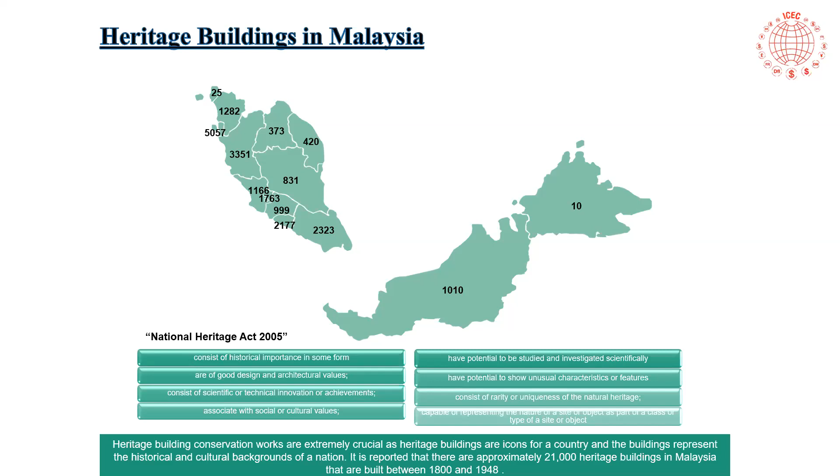Now we move on to the conventional approach of heritage buildings conservation. Before the digital approach, we have been using the conventional approach in conserving heritage buildings. So let's move on.

Globally, there are 5 main keys of good conservation practices. The first one is minimal intervention. Through this practice, we need careful recording and research. We respect the quality, and preference is given for the original materials. In terms of sustainability, we look into permanence in finished work. We need a well-defined maintenance plan and long-term protection.

The next key criteria is minimal loss of fabric with minimum alteration. We avoid beautifying it, but maintain it, and preference is given for the least possible loss. In terms of legibility, there's a distinguishable use of new and additional materials, and we avoid falsification of elements. Lastly, the fifth practice is reversibility, where we look into reversibility of intervention and allow for correction of unforeseen problems.

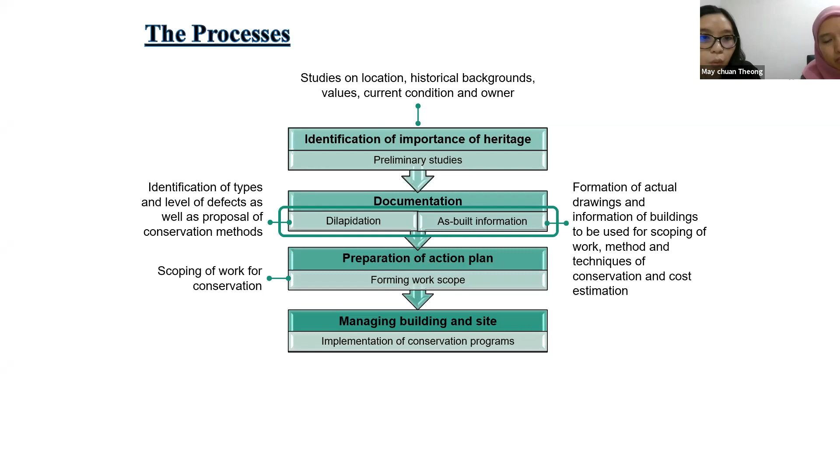The next step is preparation of the action plan, where we form the work scope, scoping down the conservation work, and planning the types of work to carry out. Once the plan is confirmed and verified, the final step is managing the building and site.

The implementation of conservation programs will follow the guidelines, reporting, recording, and all the documents mentioned earlier.

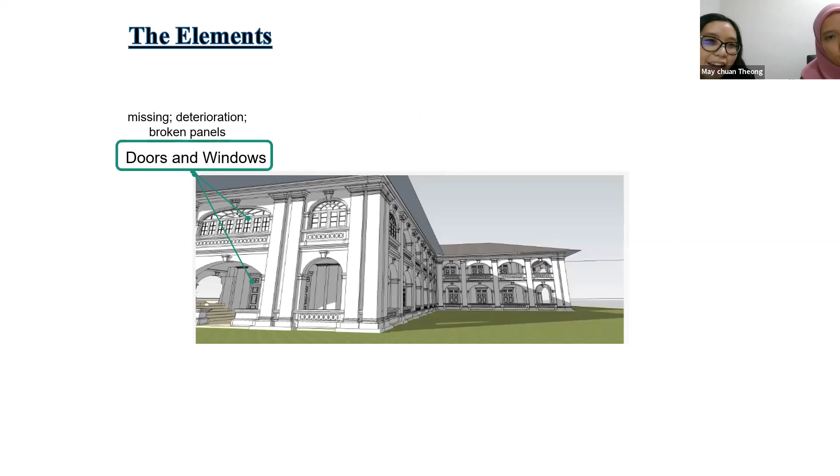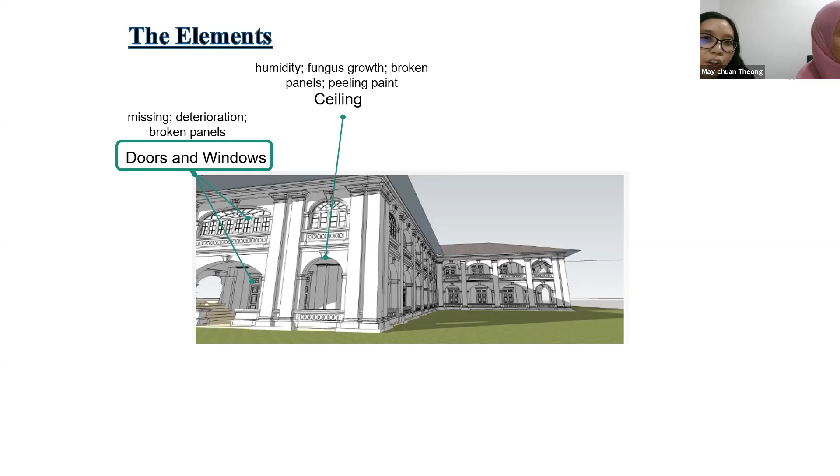Now let's move on to see what elements we usually conserve within the building. First, we look at doors and windows - are there any missing parts, deterioration, broken panels? For ceilings, the common problems are humidity, fungus growth, broken panels, and peeling paint.

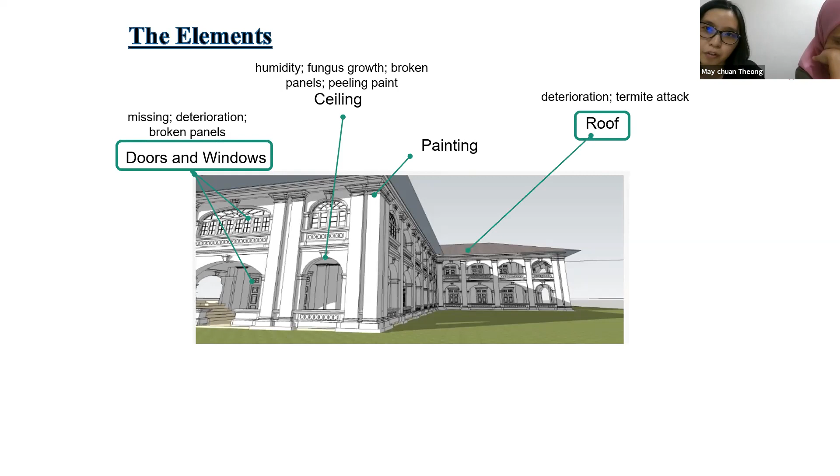Painting is something very normal and common that we usually have to take into consideration. Roof problems mostly involve deterioration, termite attack, and rainwater downpipe issues. Wall problems commonly include humidity, cracks, soil movement, deterioration, and thermal effects.

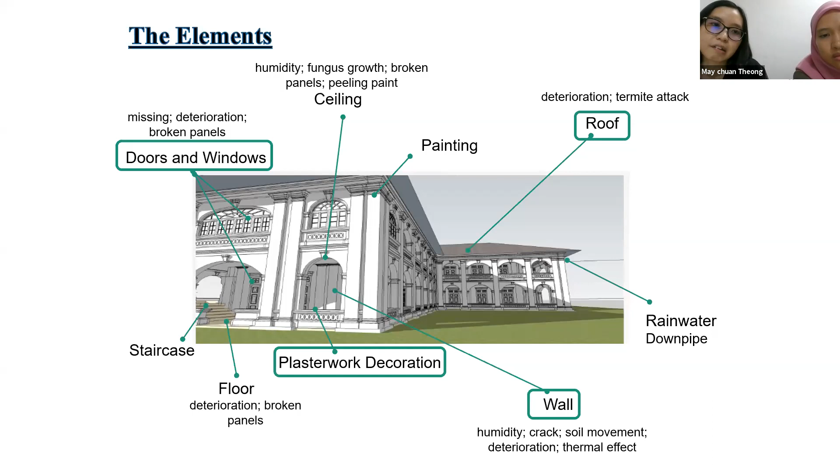Plasterwork decoration is somewhat a must-practice in conservation. For floors, the issues are broken panels and deterioration. Staircases commonly have defects as well.

So what factors contribute to effective conservation? First, we have to look into the amount of money we have to spend in order to conserve the building. The next is to look for similar materials and resources in order to maintain, not beautify, the building.

We maintain the overview or overall character of the building. We normally look for what was used years ago, so that we maintain the same material or resources. Different from new building works, it's not built from scratch - it's more on conservation, more on restoration.

The next factor affecting effective conservation is the responsibilities of the team - who is taking care of which part. That is also important, and the whole team would have a very clear mindset of what they are doing.

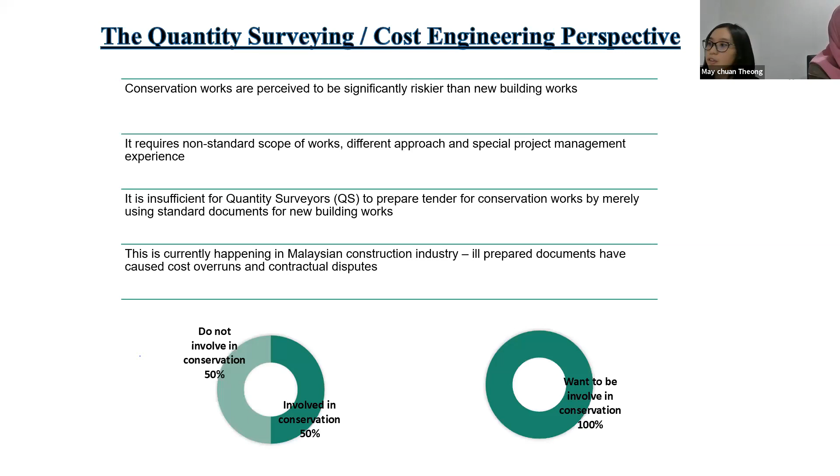But we also find out that there are challenges faced in these conservation works. These challenges have been categorized into a few categories: information-related challenges, people-related challenges, legislation-related challenges, knowledge-related, health and safety-related, uncertainties-related, and approach-related. There are a total of 30 challenges categorized into these 7 main categories.

The most severe challenge here is actually the requirement for specialized consultants. The second most severe challenge is lack of as-built drawings, followed by unknown risk, which requires a great amount of information for architectural works, failure to select a capable contractor, and availability of relevant skilled workers.

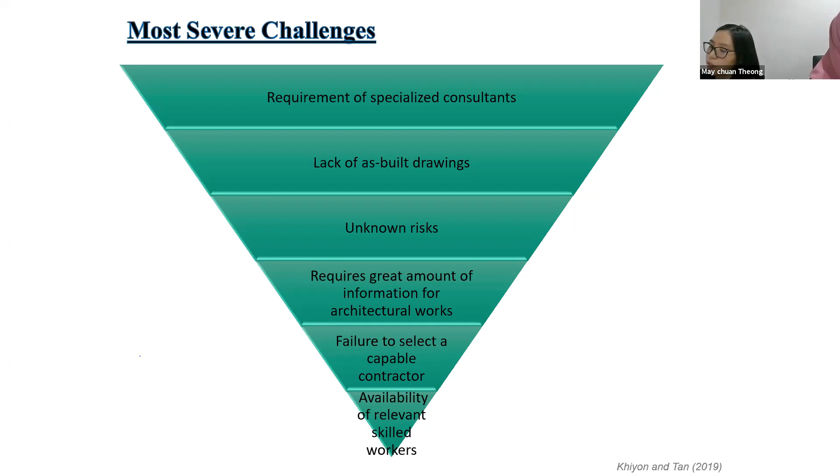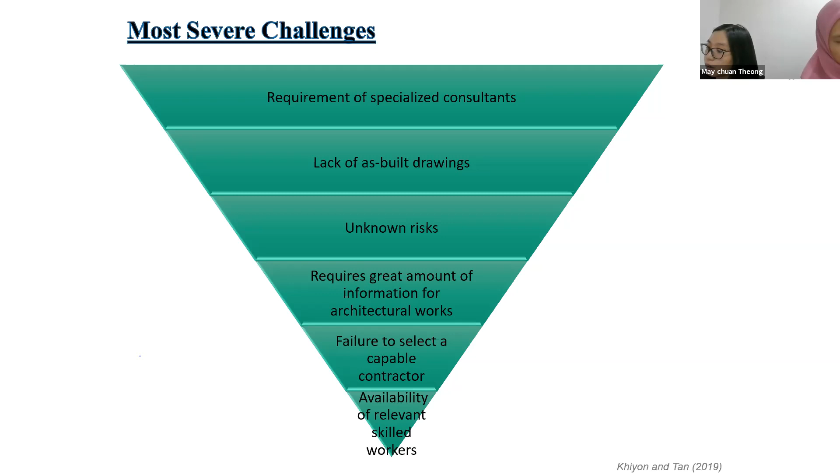Then about contractors and workers - these are people-related challenges. We believe that in the context of Malaysia, there is a lack of skilled workers due to the technical practice involved. We are also facing problems having experienced contractors in this field who are equipped with proper management skills to perform conservation practices for the projects. So these are a few challenges that we face here.

So what we can look into is the conventional approach carried out through a few processes. Before embarking on any physical intervention or design strategy for a potential conservation project, it is essential to assemble the availability of evidence on the building.

So the first part is the historical research that is available for us. We look at different sources of data, reports, and research. Then from historical research, we can identify the documentation that we need, for example measured drawing.

We know that a lot of architectural students actually start off from measured drawing. Measured drawing, or as-found drawing, means a set of line drawings that will accurately delineate the subject of the building in its existing condition. The measured drawing will illustrate the interior and exterior of a building, including the structural design. It will also illustrate the defect areas such as cracks in plaster and missing elements.

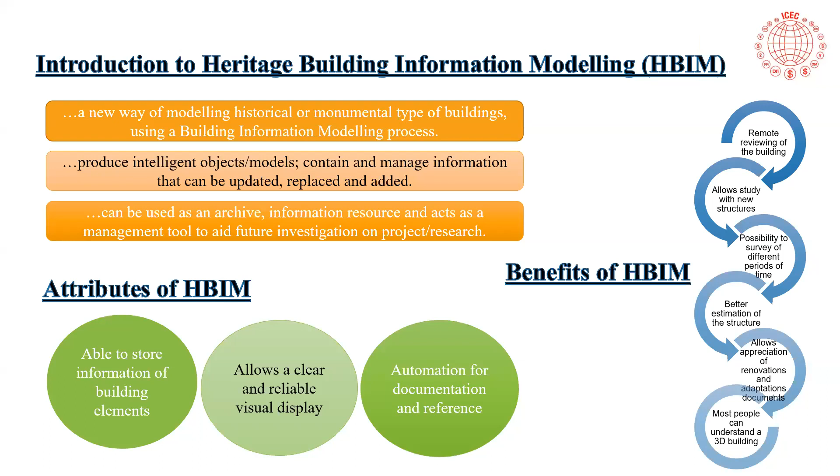So when we venture into HBIM, the first thing we have to know is the BIM tools. That's the most important.

All right, so if you look at the introduction of HBIM, the second point is it produces intelligent objects and models, containing managed information that can be updated, replaced, and added. Later we will go through the process from scanning to becoming a 3D model. From the 3D model, we can produce intelligent models, objects or elements that contain data information and related information. This gives us attributes of HBIM which allow a clear and reliable visual display.

And these are some of the benefits. There are a lot of benefits of HBIM, but I will show you some of them. The most important is that it allows study of new structures, because we know the heritage building has been built many years ago, so there are some structures and methods that we cannot find anymore in the current world.

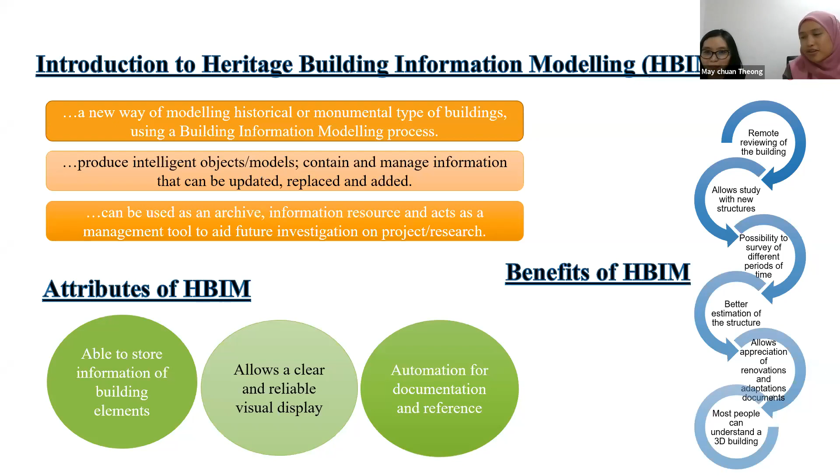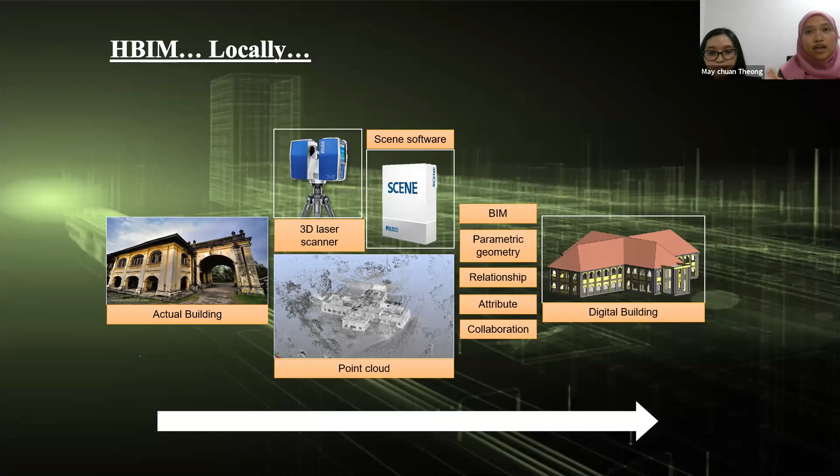After the point cloud, you get the IFC file or RCP file, which converts or links into Autodesk Revit or other architecture software. This is an innovative approach, a similar process. We will go through each stage one by one.

For the first stage, data collection: once you identify which type of historic or heritage building you want, first you need to visit the place to find out where it is, whether it's safe to do, and to check the condition of the building in terms of safety, such as whether it's abandoned.

For example, we went to the Johor Art Gallery, an abandoned building with no one there for a few years. It's very dangerous to go alone, so you need to bring colleagues together to do site surveying or scanning.

Once you collect the building, identify the building, you need to do some layout planning. Layout planning, at least you need a floor plan. For example, if the Ministry of Tourism or government doesn't have the floor plan of the heritage building, we ourselves can do our own floor plan. So we just visit or enter the building to see how the floor plan of the building is.

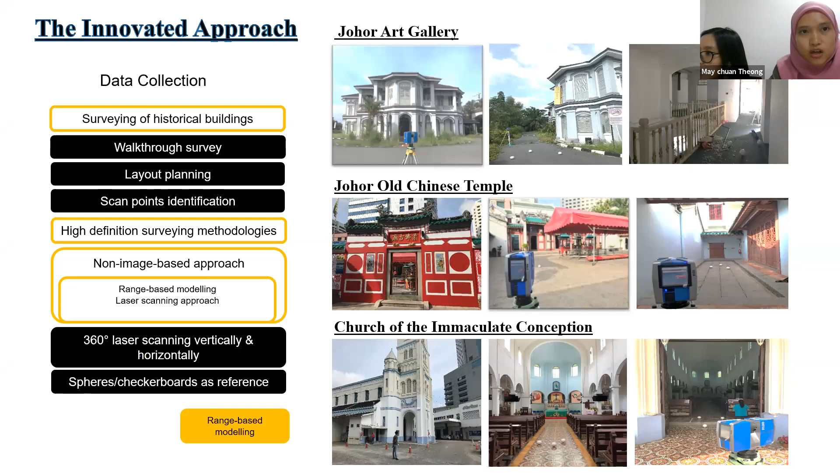All right, the second stage, which is data processing. So once you have the scan points, for example, let's say I have one building with 20 point scans, when they enter data processing, we are going to use Scene software to merge all the 20 point scans into 1 point scan. So that 1 point scan is the one you're going to put as a 3D model.

For example, this top point, if you look here, is Hilltop School. It's still in use. We went there during school hours, so we scanned the external while students were inside. Once they left the school, we could scan the interior of the building.

If you look on the left side, this is what we call point clouds. You see the dots, right? That's what we call point clouds. Similar for the second one and the third one. Later I will show you through the recap so you can see a bigger picture.

If you look next to the point clouds, this is not from camera. This is also from the point scans, point clouds, but it's already converted into photogrammetry. Because we already reduced the noise and inserted the photogrammetry, it becomes like a full picture.

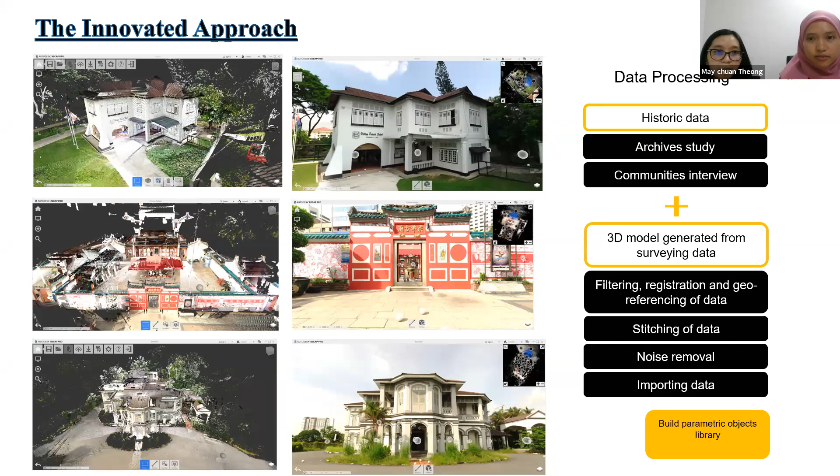This is an example of one that we have scanned, the Johor Bahru Old Chinese Temple, the oldest Chinese temple in Johor, Malaysia. If you look at the bottom left, the number of scans is 20 scans. We only did this for 1 day. Each scan involves 5 minutes, so 5 minutes times 20 scans is about 1 to 2 hours. It looks like 1-2 hours, but we already spent a whole day because of people coming and going, we had to wait for a while, and then others.

So the total of point clouds there is 149 million points. In terms of RAM, that's 21 gigs. That's why in HBIM, one of the challenges, or maybe one of the characteristics, is that you need a high spec computer. Even for one building, it already consists of 20 gigs.

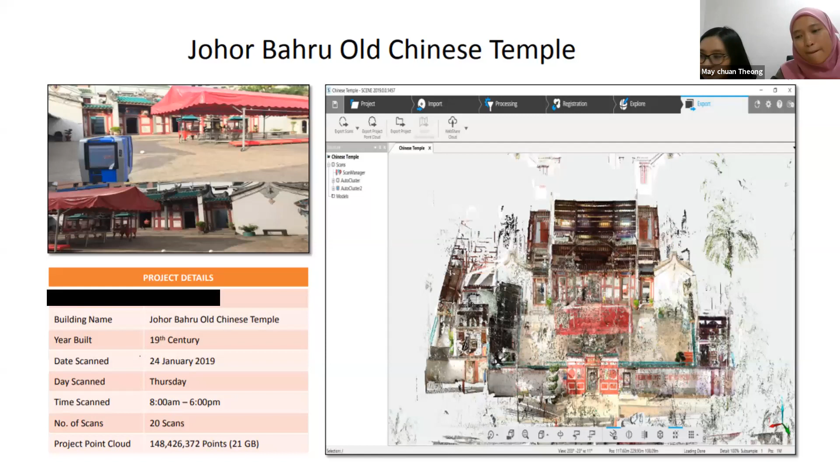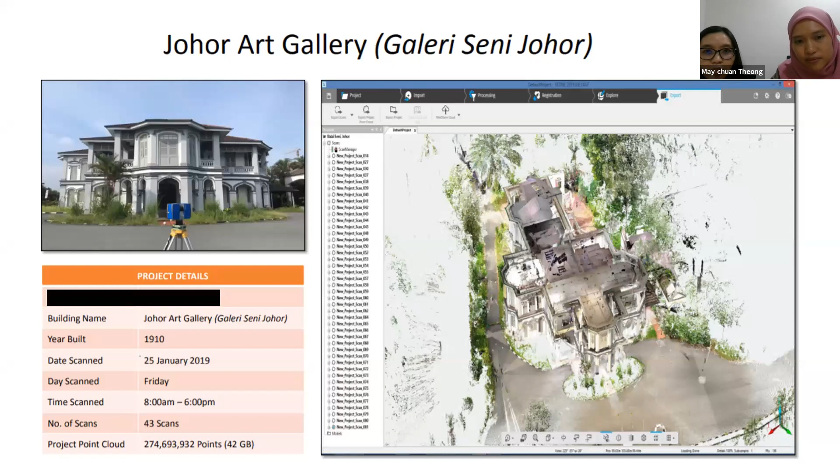Okay, the next one is Johor Art Gallery. This is the overall point clouds. If you look at the bottom, the number of scans is 43 scans for 1 day only, and the project point clouds is about 275 million points.

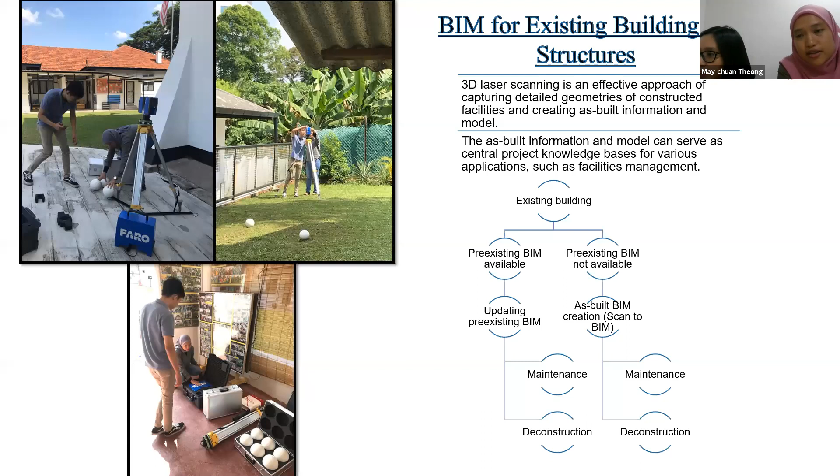Apart from heritage building, HBIM can also be used for existing building structures. So this is the laser scanning we've used, Faro, along with the spheres. 3D laser scanning is an effective approach for capturing detailed geometries of constructed facilities, and it can also produce as-built information and engineering drawings for maintenance, facility management, and retrofitting, among others.

Okay, the last process is data synthesis. You have done your scanning, you have converted the point scan into point clouds, and now you have a point scan which you're going to create into a 3D model.

Okay, this is a sample of National Art Gallery. At the top of the photo is the point cloud. So the point scan is linked into Autodesk Revit, and once you enter Autodesk Revit, you can see the point scans.

So how do you want to create a 3D model? What we are doing now, we do it manually. We need to trace back floor by floor. But now Autodesk Revit already comes with an as-built interface. If you look at the new Autodesk Revit, it can automatically generate a 3D model, and then you need to touch it up a bit to ensure it looks like a full 3D model.

So I'll show you this is as-built. Just a moment. This one. Okay, alright.

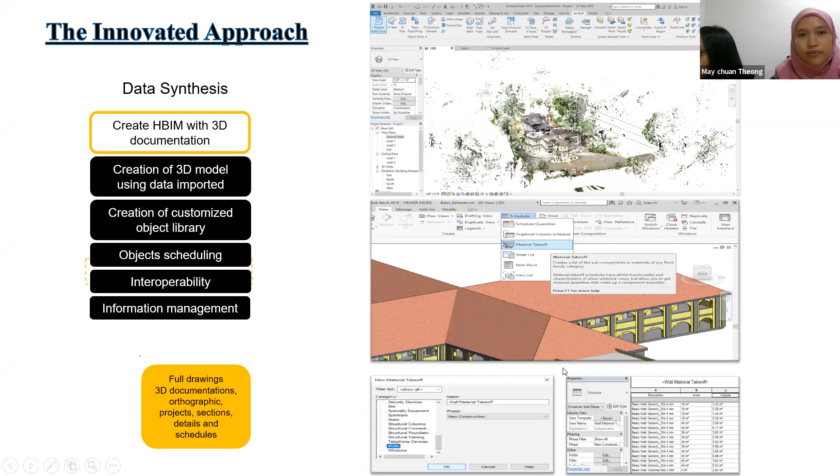Now I'm going to share some of my point scans from the Autodesk ReCap. Can you guys see this? Oh yeah, mute, yes sorry. We can, yes, okay thank you.

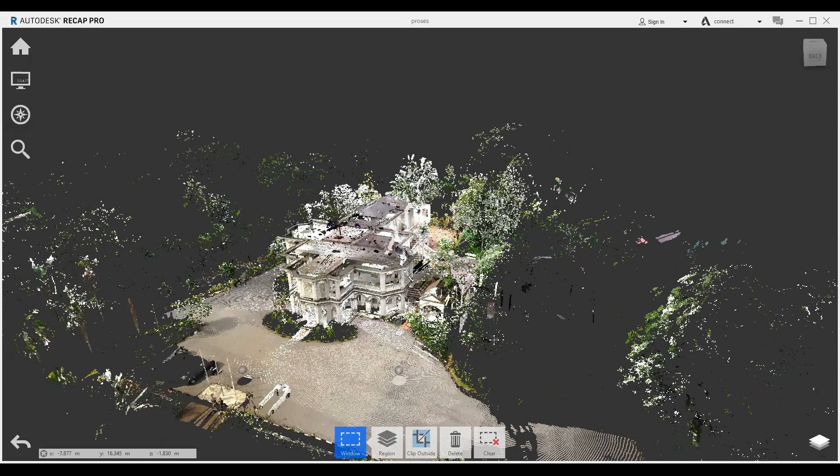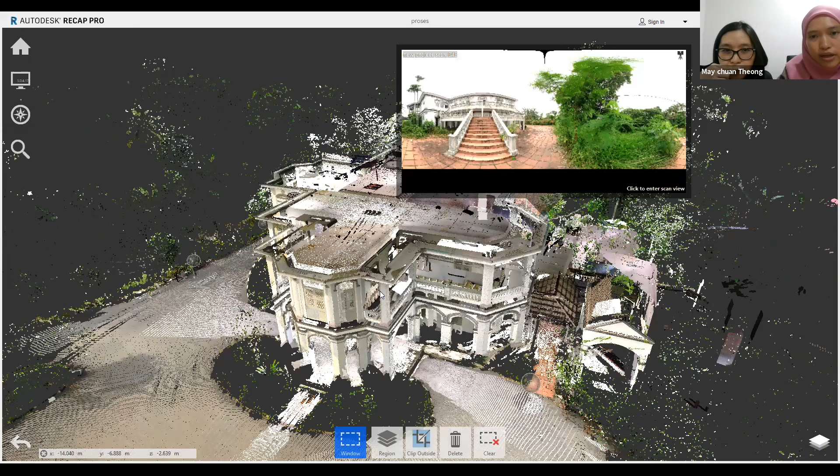Okay alright guys, this one is Balai Seni Art Gallery. So this is what we call point clouds, you see the dots. Now we are using Autodesk Recap, it can be any architecture software but we are using Autodesk Recap. So from this point scan, if you look here, this is a point scan. We put our scanner here and it scanned the building.

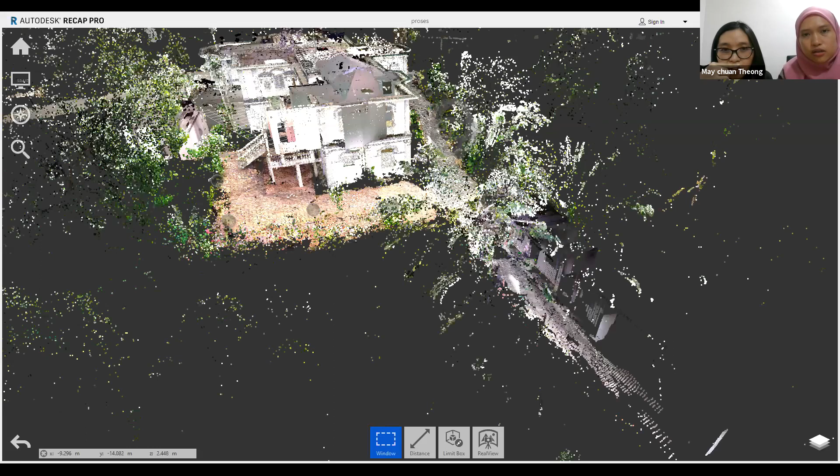For example, I click this one, I have to wait for a while. Okay, this is the building. Okay, we go back. For example, just a moment. Just can't click, is it? Okay sorry, this is the points, the building point clouds.

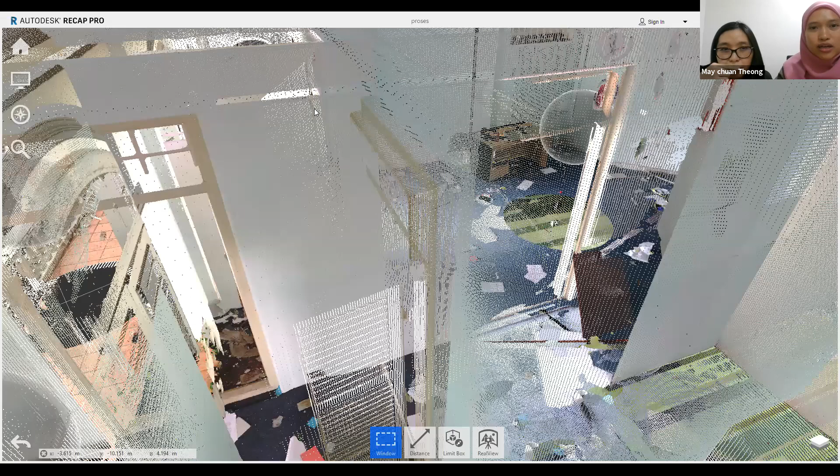So using Recap, you can go into the building itself. Let's say I'm going now. It's best when you use virtual reality, right? When you use virtual reality it looks real, you're playing games inside the house. So now I'm in the house, you can see this is an abandoned museum. If you look closer, the condition of the house, sorry because it's lagging, yeah this is inside of the building.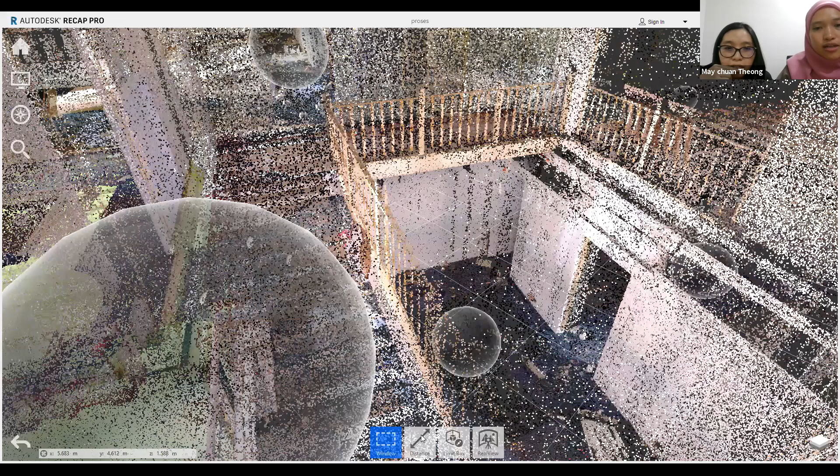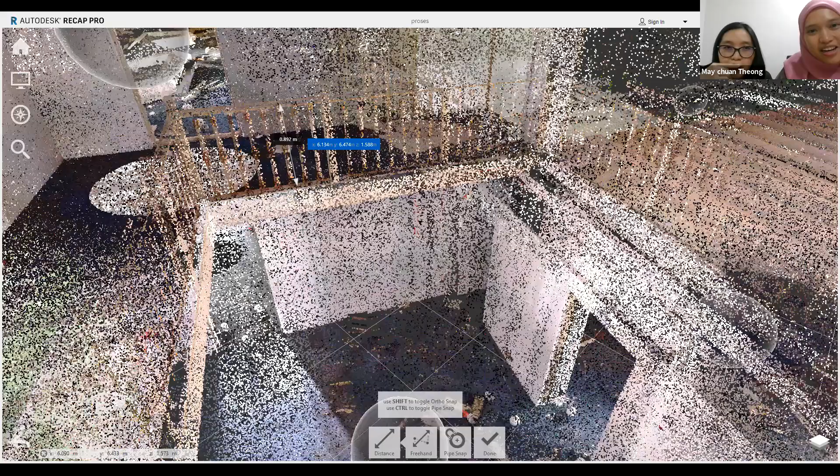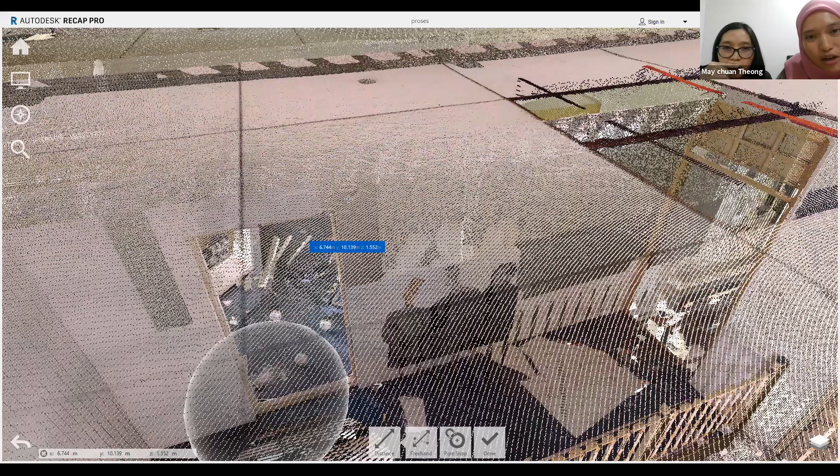See, for example, okay. Now from Recap itself, actually you can do some measuring. So let's say you are a QS and you want to do some remeasurement, you can just measure the height of the building. The accuracy is about 0.01 millimeters, so it's quite accurate. And then let's say if you want to measure an old building, a heritage building, you don't know the size of the old door, right, length or height. So with the software that we have now, we can use it to get the height of the door. For example, like this, so the height of the door is 2.7.

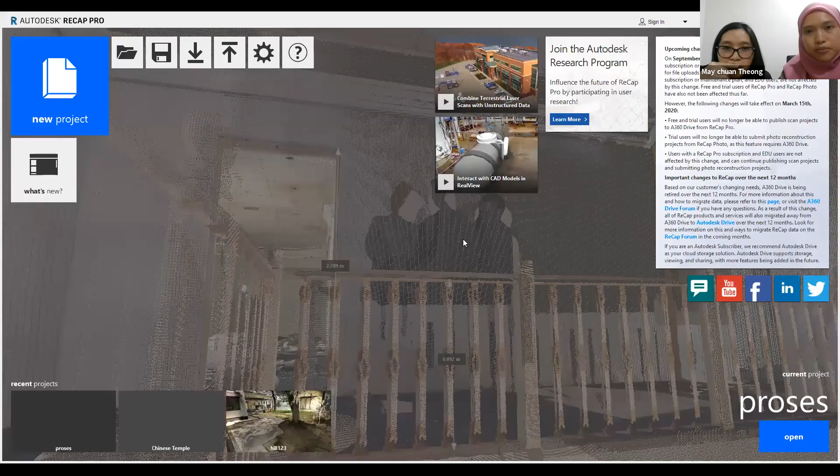Okay, the next one, so I'll show some others as well. This is a Chinese temple, it's in the middle of the city, surrounding by high-rise buildings, and it's the only Chinese temple. Alright, see, if you look closer, the detail of the point clouds itself.

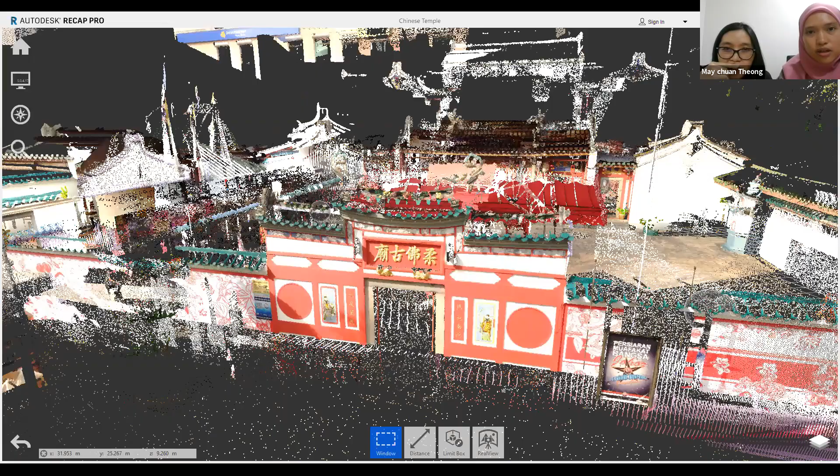Okay just a moment, sorry. Okay right, this is a point, for example. So you can move on. Okay a bit slow. Okay right, so the next one is, sorry.

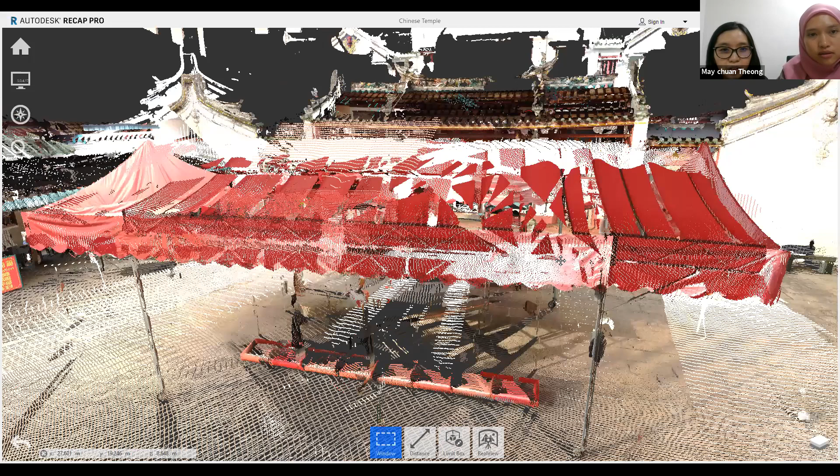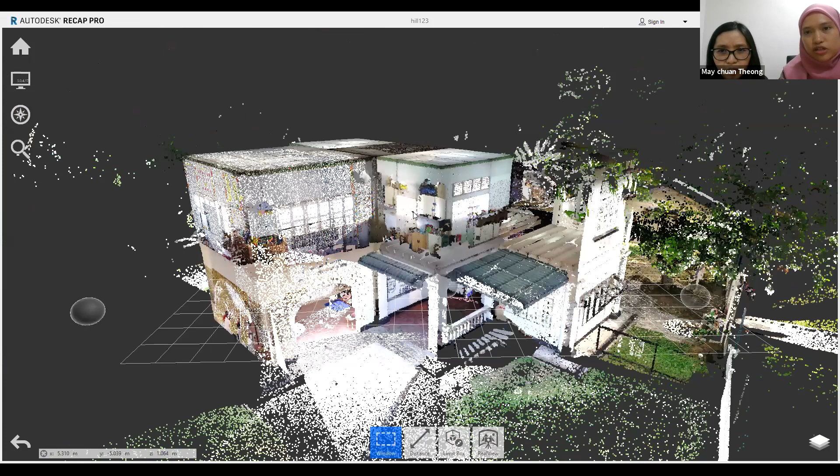Hilltop School, it's a school, the one that we scanned. Alright just a moment. Okay this is the exterior of the building, and we can just go inside to see the interior of the building. So this is, I think, secondary school - sorry, kindergarten school. Okay, so just some samples.

Yeah, just one minute. Just a moment.

Okay, alright, so the output of the digital approach. So just now Mei Chuan already explained about this principle - identification, documentation, and preparation. So the output of the overall digital approach is at a micro level and a macro level. At the micro level, you can build an as-built information, based on redesign, cost estimation, and 3D printing as well. So at the macro level, the more important thing is to increase awareness of conservation.

So yeah, even though we are not conservators, we as part of the construction industry have to ensure that we maintain and protect our heritage buildings from demolition by the government, and also to ensure benefits for tourism, as well as for our younger generations in the future.

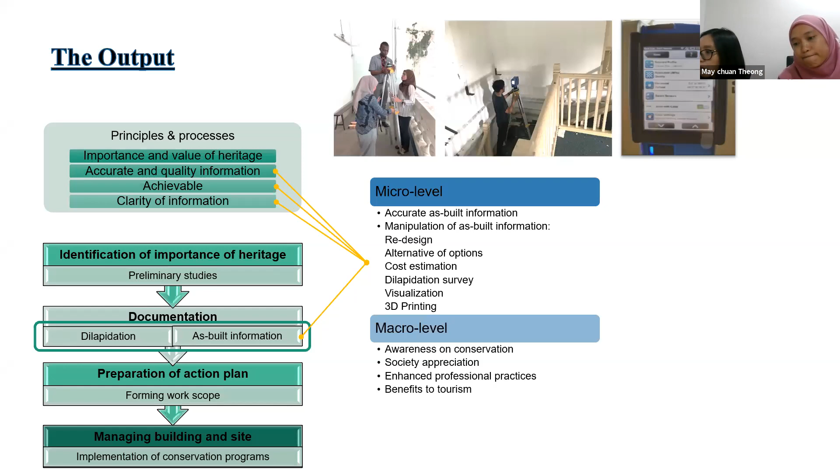Okay, I will show you some example case studies from international projects. The first one is the Parma Cathedral in Italy.

They did about 20 scans, exterior and interior of the cathedral. This is what they came up with as a point cloud after registration, and then they came up with photogrammetry, and a 3D model in Revit software.

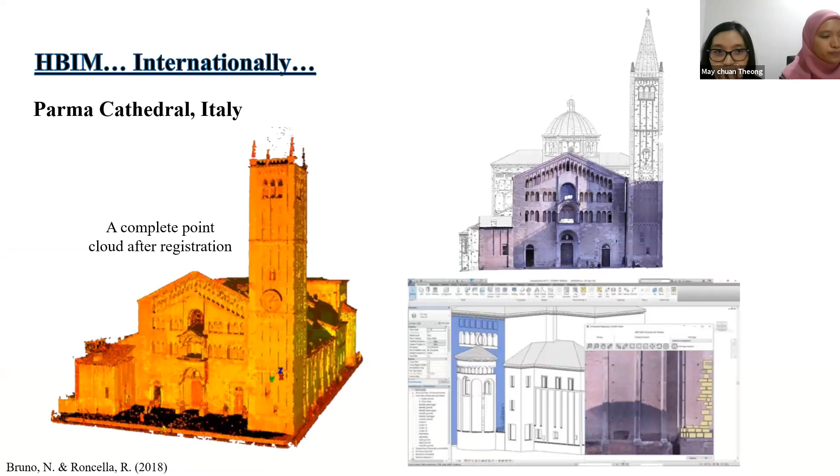The second international case study is Cortijo del Fraile in Níjar, Almería, Spain. I hope I pronounced it correctly. This is an abandoned building, left for about 40 years. The purpose of doing the HBIM is to sustain the building itself. But the problem is they cannot enter the building, so how do they scan it? How do they scan the interior?

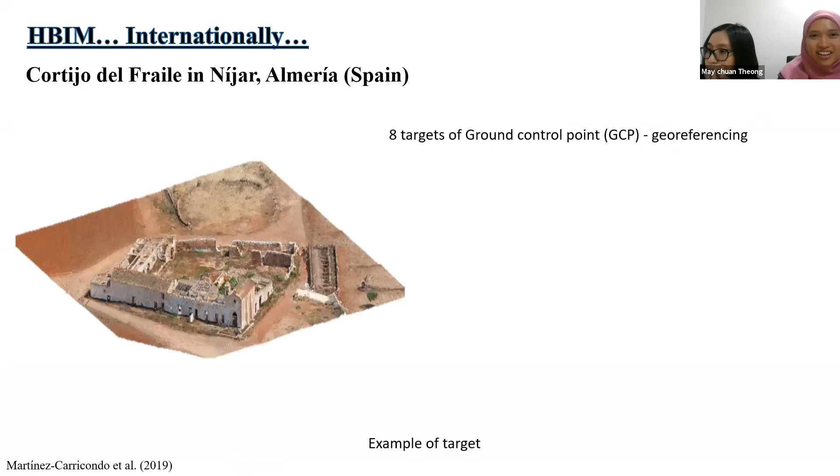In this case study, they are using UAV, unmanned aerial vehicle, which is a drone. They use the drone to capture the building, the interior of the building. If you look on the right side, 8 targets of ground control points have been used as point scans, using a target checkerboard. Like our case study, we are using spheres, but they are using targets.

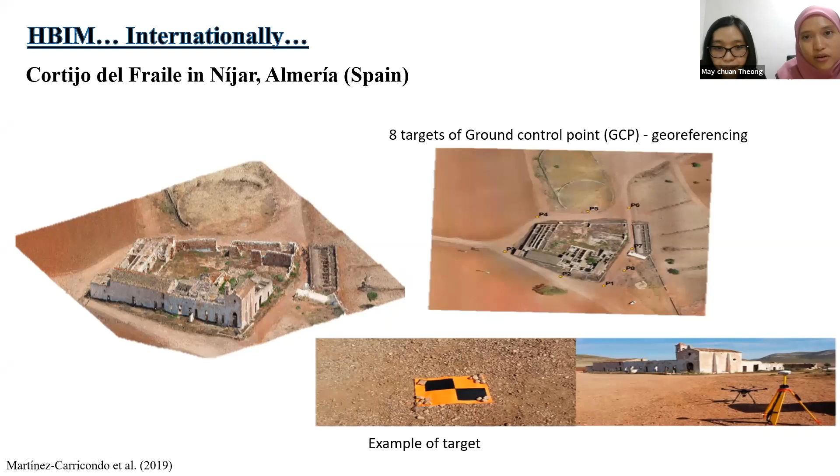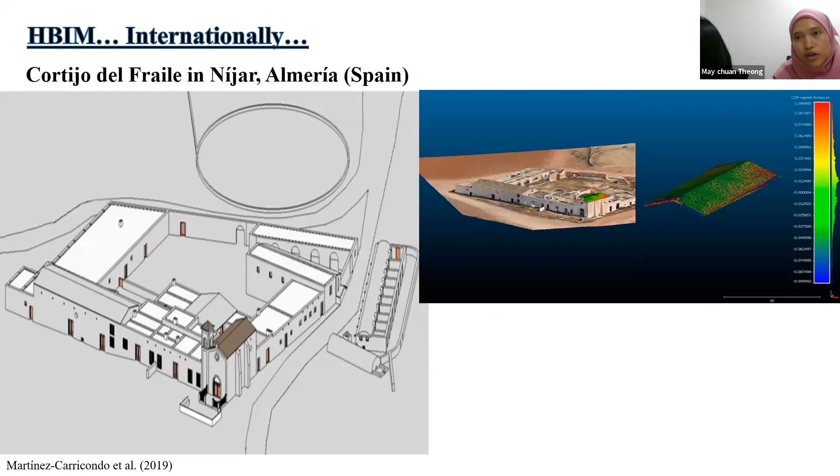So it's a sphere, and then they come up with the whole 3D perspective, and they can use it to analyze the lights, the roof, and others. And they also come up with 3D rendering.

The next one is the Nasif Historical House in Jeddah. The purpose of doing HBIM here is they want to turn this building into a museum. This is an abandoned building, so they want to create this building into a museum. They did scanning, laser scan, and came up with point clouds, a 3D model, and also a rendering model.

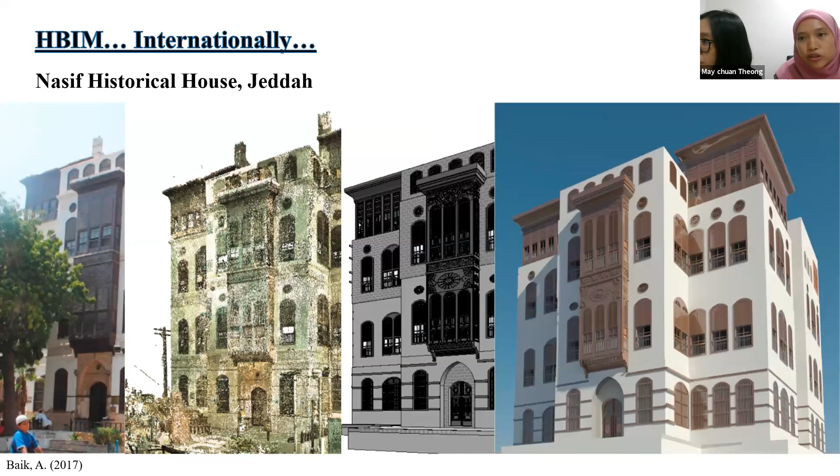The next one is Santa Maria dei Miracoli Church in Venice, Italy. This one is very different, kind of a new method to scan the building, because the building itself is situated on the water and surrounded by water. In order to avoid flooding, they are using GIS.

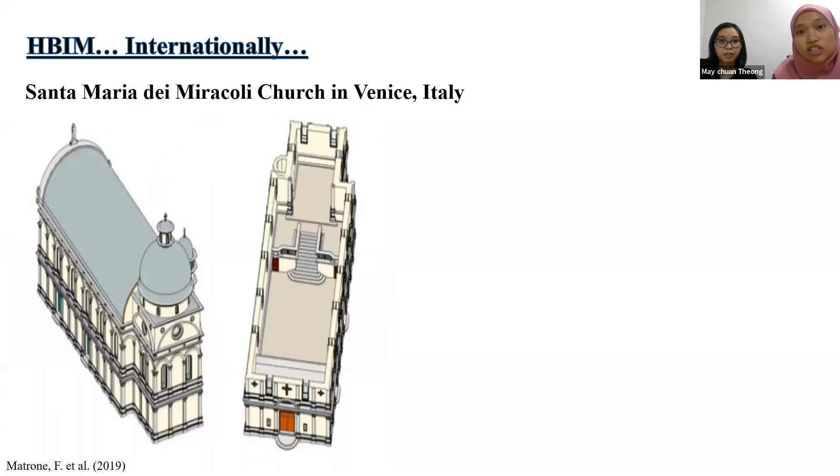GIS, which focuses on georeferencing. They focus more on Google, using Google Maps, or going satellite. So there are many tools, many ways to scan the building, not only using a laser scanner.

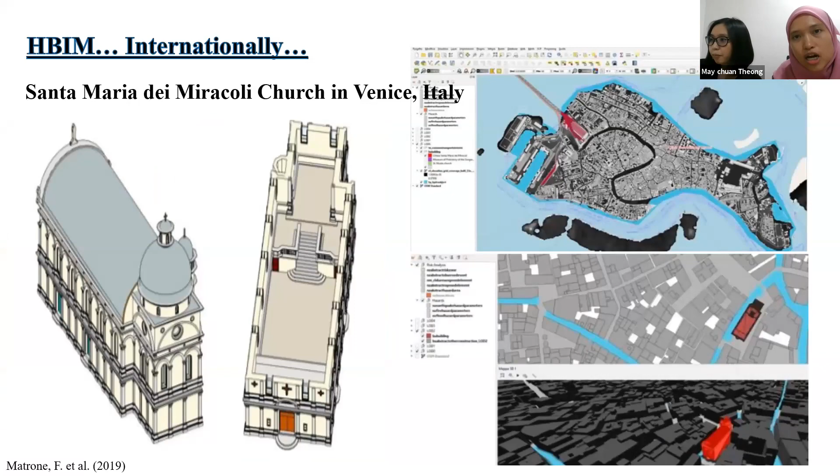Okay, now I'll pass to May Chuan. Let's move forward to the way forward of heritage building conservation. We have shared what we have done in Malaysia, Johor Bahru state mostly, using the 3D laser scanner. We have also shared what has been done globally—some using drones, some using GIS or satellite. So in the future, what we are planning is to take a different approach.

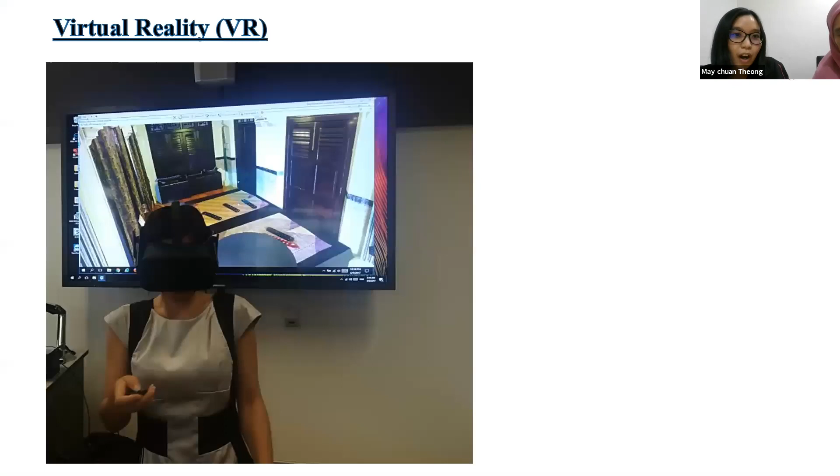The first one is VR. This is what we have actually carried out using virtual reality, that allows visualization without the need to be physically at the site. It is an advanced technology that offers better, accurate, and reliable measurement, and it has also avoided some issues relating to health and safety. It gives us real experience in investigating defects and required maintenance. So from VR, from what we can see from the photo, we can visualize the building itself internally and externally without having to go to the site.

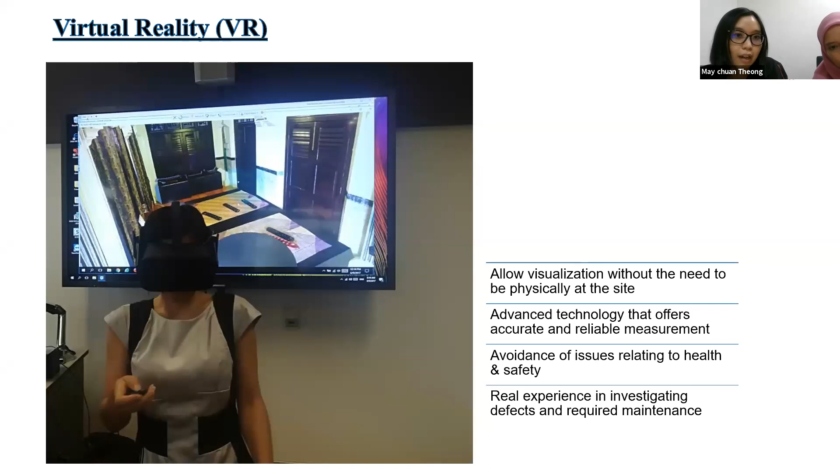The next approach we can use is augmented reality, AR, different from VR. It handles HBIM with portable devices with the aid of technology. Basically we use handphones—just a handphone will do. This improves collaboration among professionals like architects, archaeologists, restorers, historians, conservators, engineers, and others, using these handphones or other portable devices as convenient tools. Because these portable devices are able to connect people to heritage, create knowledge, preserve resources, and enhance visualization.

The next one is actually 3D printing. 3D printing is a digital controlled sequential layering of materials to create 3D shapes.

We have mentioned quite a lot about 3D laser scanners and 3D models. This 3D printing is useful for prototyping and creating highly customized building components. Whatever it prints can be scaled to the scale required. It facilitates complex and sophisticated design, but it has some challenges.

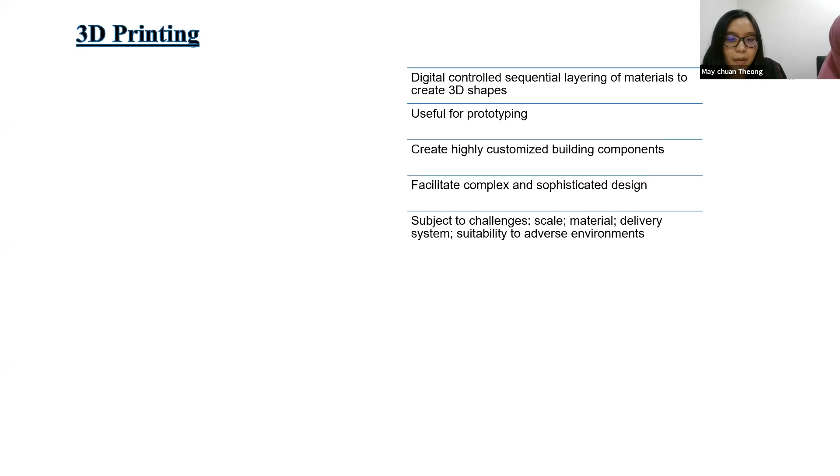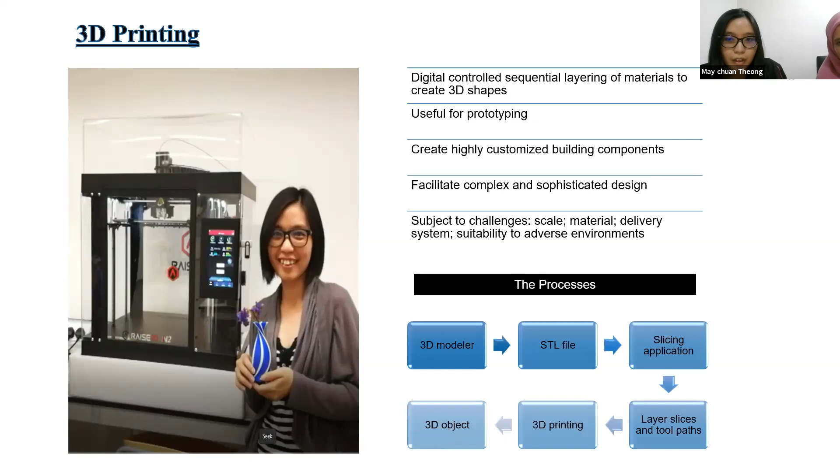So the process is simplified into a 3D modeler. Let's look at the process: we have model acquisition, in which the dimensional data of an intact historical building component is directly measured using a 3D laser scanner. We still use the scanner.

Then the point cloud data is inputted into the reverse engineering software, which automatically turns it into PCD and into a 3D solid model. Then we use program generation.

From here, we can generate the program and select materials. Next is the printing itself, which takes a lot of time too. The control program coordinates the machine movement and cement mortar extrusion so as to layer the construction of the component.

The vase that we can see from the previous photos took us more than 8 hours, up to 16 hours, about one day. The vase looks small, but it takes quite a long time.

Lastly is the component installation stage, where the printed component is post-processed or polished and installed to replace the damaged one on the historical building, finalizing the reproduction process. So these are the 4 main stages in 3D printing.

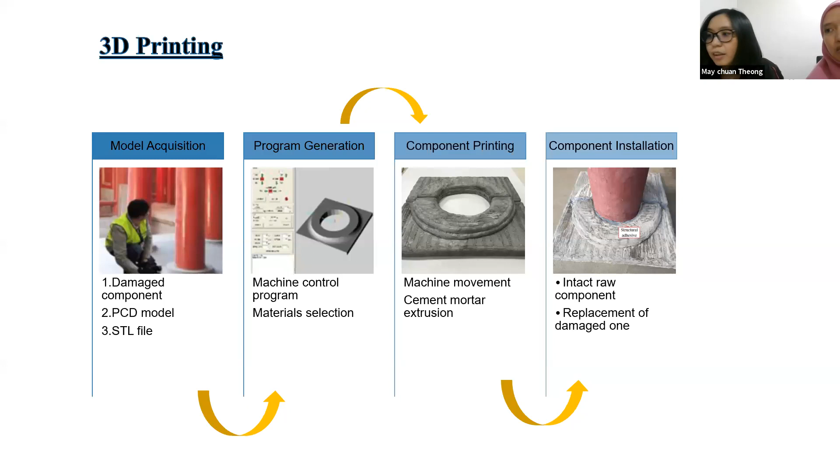Okay, lastly, we are going to share with you some videos and some historic building information modeling, HBIM, that is actually on the move. Let's see what happened on 15 April. I hope everyone knows.

This is Notre Dame in Paris. On 15 April there was a fire, and the spire of the building collapsed, and it also affected some of the roofs. We hope everyone knows the news. Okay, I'm going to show you some of the news.

Everyone was worried because Notre Dame is a heritage building, so they wanted to rebuild it. At one point there was news that they already had a 3D model of Notre Dame. A late art historian had already scanned the building, I think 5 years before this happened. So this is some of the news that has been around the world.

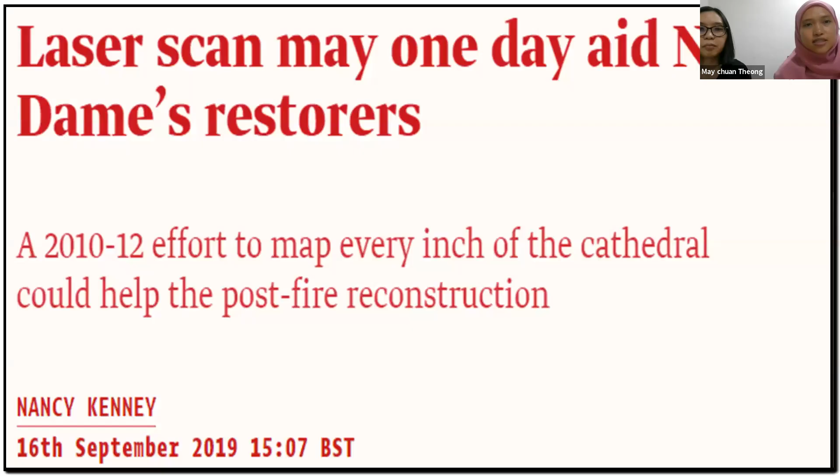And the latest news is on July 13, 2020. Because of the lockdown, they had to stop all construction. Now they have finally continued the construction. Okay, so we go to the next one. All right, I'm going to share you this.

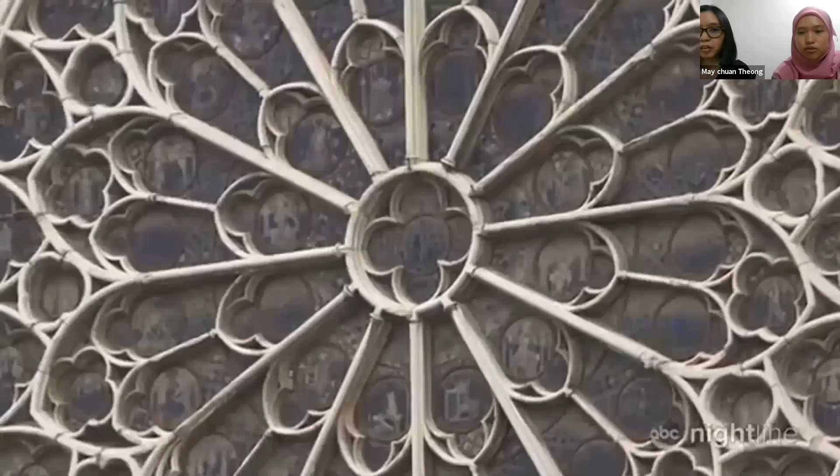Okay, this is the lead historian, Dr. Andrew Tallon, his name.

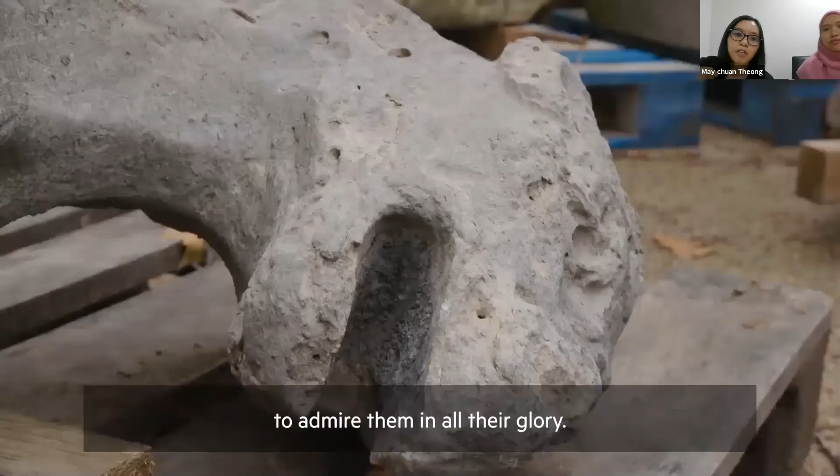Okay, so the last one. From what we know, in 2010 Dr. Andrew Tallon carried out the scanning. The fire happened in 2019. Dr. Andrew actually passed away in 2018, just a few months before the fire, on November 16th. So luckily he had already done the scanning part.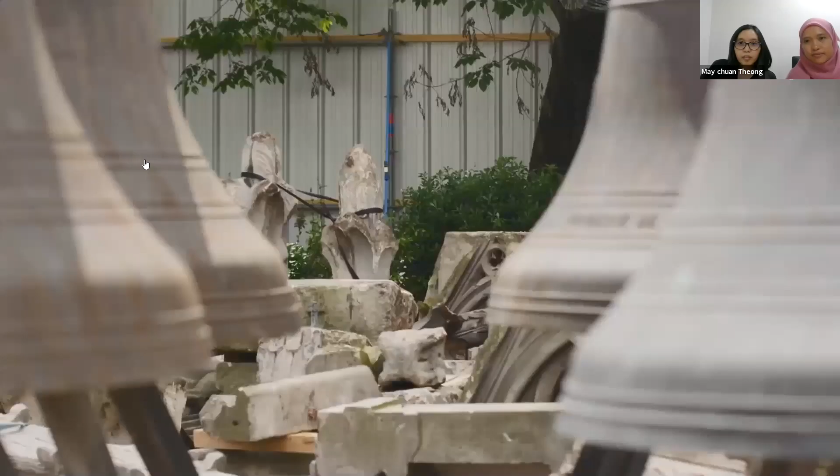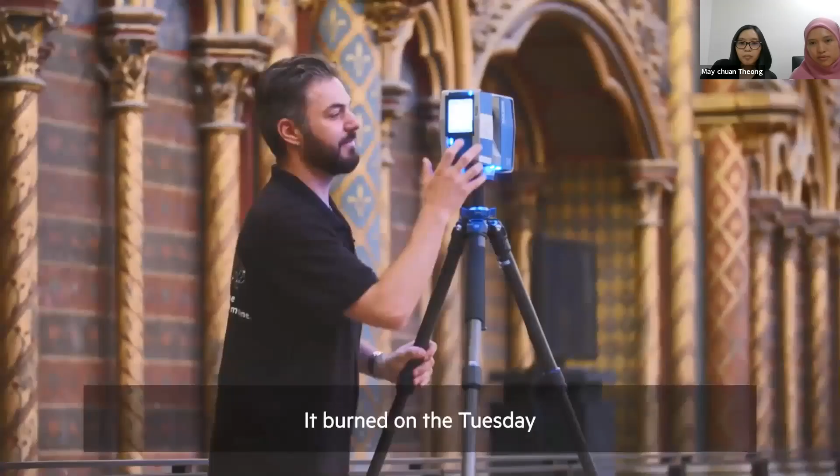Okay, and the last video for today's session.

Okay, this is how the Faro laser scan looks like.

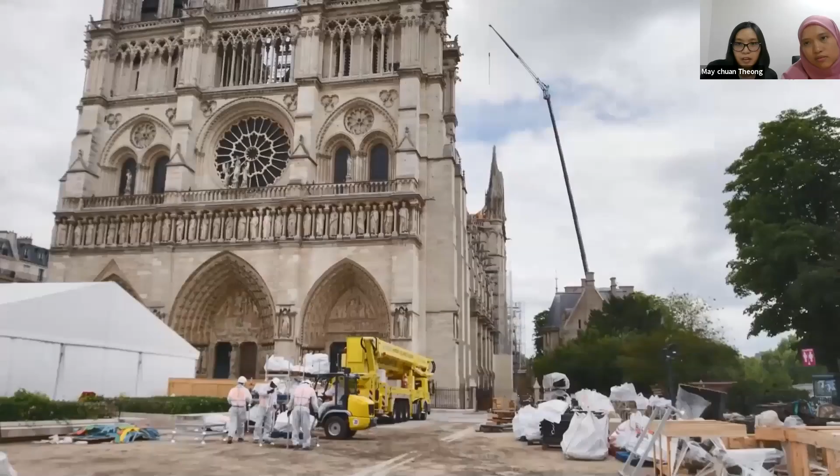Okay, so the scanning was done using the Faro scanner, which is similar to what we have used. It is a 360 rotation scanning, which takes points.